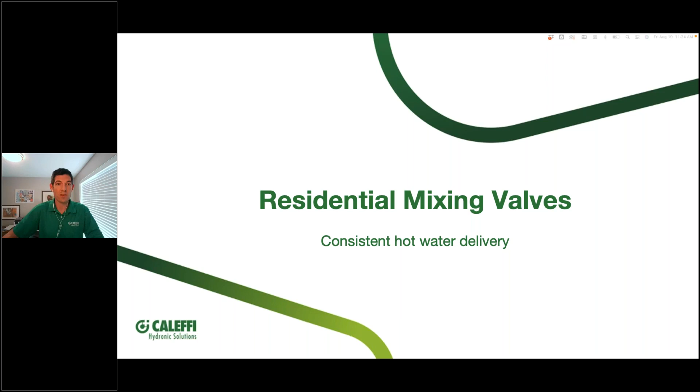Generally mixing valves are thermostatic style mixing valves for residential applications, but there are some electronic options too. You'd probably see those in a more commercial, larger building. Often you'll see TMV for thermostatic mixing valve in other literature as an abbreviation.

So why do we use a mixing valve? First, to supply consistent hot water to all the plumbing fixtures, regardless of what's happening in the mechanical room with your water heater, whether it's a consistent temperature all day or if there are fluctuations like you'd see in any water heater, electric or gas. When it turns on, it may heat the water a little warmer than your set point by a couple degrees, then fall a few below before it refires. That's normal, so we use mixing valves to smooth that out.

We use them to protect occupants from high temperatures. Whatever happens in the mechanical room, we don't want water to leave the mechanical room and hit a faucet somewhere where you could scald somebody. As plumbing professionals, that's what we're trying to avoid.

Another thing they can be used for is to add capacity to a water heater. You can store the water warmer and build more capacity into that water heater without purchasing a larger model, just by storing it a little bit warmer.

Bigger picture, what we're trying to do is enable load shifting at the utility level and keep utility bills low by staying off-peak electrical. What we're trying to do is boost that thermal battery we have in the mechanical room, and then coast through the periods where we don't want to use electricity because it's more expensive and may cause brownouts if everybody had their water heater on at the same time in extreme cases.

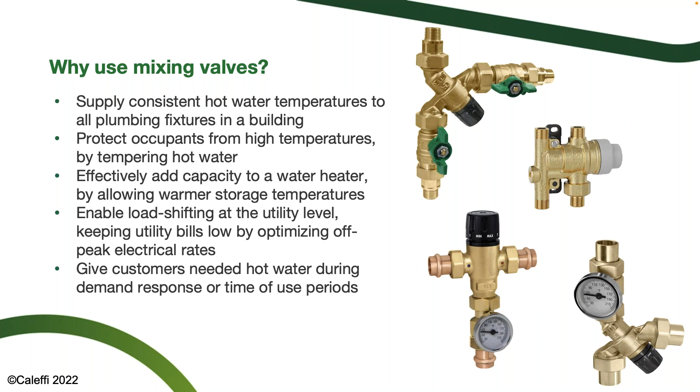So that's one way we give customers exactly what they want, which is hot water during demand response time-of-use periods without noticing anything, without having the customer pay more because they're on peak rates, and also helping utility companies maximize the benefits of renewable energy and not have to bring on peaker plants that make the energy mix less clean. Those are some of the main goals, and how we help with thermostatic mixing valves is generally by smoothing out that delivery.

There are two different styles generally of mixing valves in the thermostatic mixing valve category. A point of distribution mixing valve is going to be an ASSE 1017 listed valve. This is generally located near the water heater, serving the hot water fixtures for the whole building. A 1070 valve, like in the bottom right corner, would be used in a commercial setting, like a hospital or school, where you put one of these valves near a couple faucets, one per faucet, like you'd see in an airport, to limit the temperature at the sink or at a bathtub.

The 1070 valves on the bottom are used for scald protection - they will actually stop flow when they exceed the set point. The valves on top, point of distribution, just smooth out what's leaving the mechanical room, but per the ASSE listing, it does not close the hot port or mix port completely to stop the flow of hot water into the building. I'll cover that in more detail with some valve designs. But the reason we do that is...

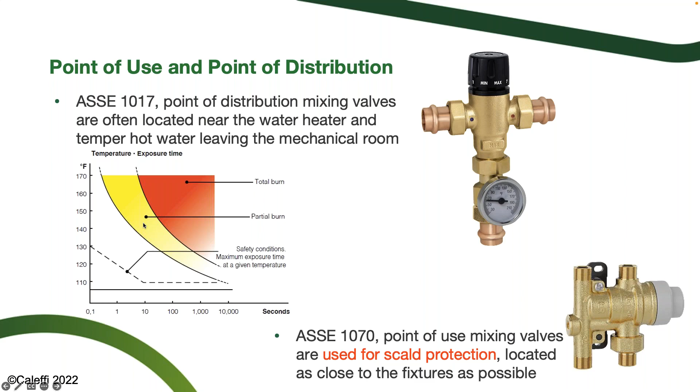140-degree water for 10 seconds is enough to give you a partial burn. And anything warmer than that, if we get into load shifting scenarios where we're storing warmer water, we really can't have that hit the fixtures in a house where we risk scalding somebody pretty quickly. That's what we want to avoid at all costs.

Another reason we would use this thermostatic mixing valve is to increase capacity without buying a bigger tank. Let's look at this example and say you live in Atlanta, Georgia, in this orange 62-degree incoming water band.

If you have a 60-gallon water heater stored at a baseline of 120 degrees Fahrenheit, you could increase the set point to 130 degrees and add 17% capacity. If you stored it even warmer at 140 degrees, capacity increases to 34% above that. So essentially, you're turning a 60-gallon water heater into an 80-gallon tank without letting 140 degree water

leave the mechanical room. That's why you use the point of distribution mixing valve. The next slide will go through the explanation there.

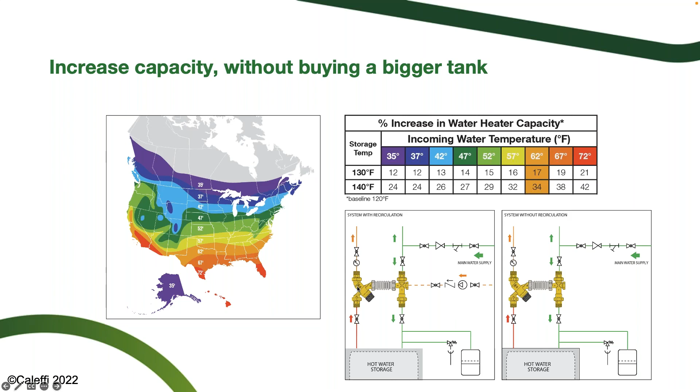So these are a couple simple piping diagrams here. Just a simple valve with or without a domestic water recirc connection coming into the building if it's a larger house. Pretty simple components to allow you to gain some pretty significant capacity there.

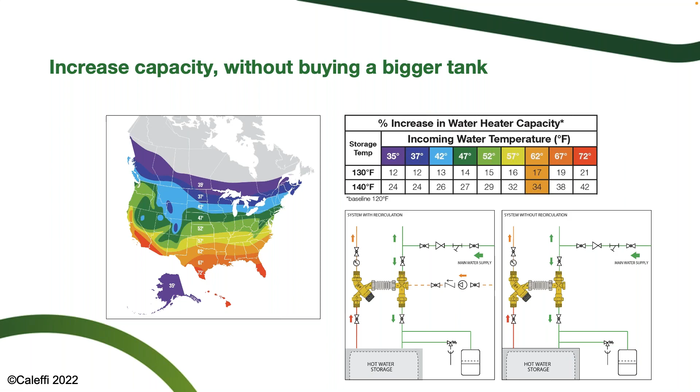There are some cases too where just a bigger tank wouldn't fit in the mechanical room. So a 60-gallon water heater stored warmer could be a good solution there.

Okay, so while the tank temperature may change during the day, when done properly, the occupants may wash their hands, take a shower at any time throughout the day and not notice any difference in the water temperature.

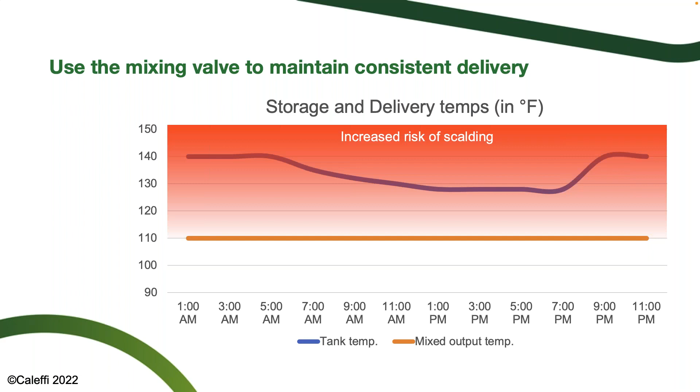It's not safe to send 140 degree Fahrenheit water out to the building, as we mentioned before. So even if the water heater can produce it, what we're going to do is limit the outlet temperature, in this case to 110 degrees leaving the mechanical room. So we're staying well below that higher risk of scalding there.

Even though the tank set point may be higher, you may have charged that up to 140 degrees. You let it coast a little bit during the evening hours and during the day, and then you charge it back up.

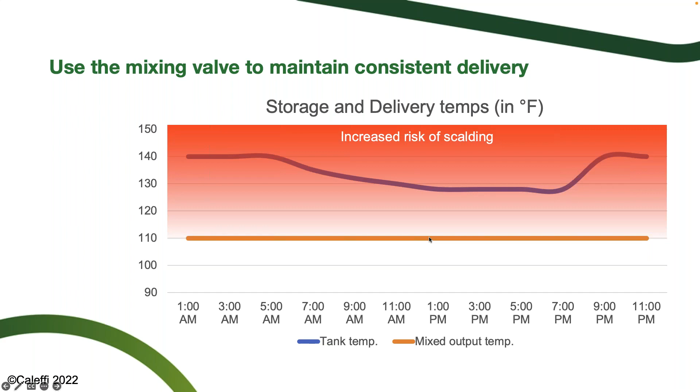So all of this is happening in the background. The only thing the homeowner sees, regardless of what minute in the day they take a shower, is a consistent delivery. That's what we're looking to do with a thermostatic mixing valve paired with a heat pump water heater.

One thing to note for installers when putting these systems together is all mixing valves will have a minimum temperature difference between the hot water inlet and the mixed water outlet. So if you're storing your water heater up to 138 degrees, with an 18 degree Fahrenheit difference, that means you won't get more than 120 degree Fahrenheit water out.

So if you store your tank at 138, that does not mean you're going to mix to 137 and send that out to the building. You have to subtract that minimum temperature difference between hot and mixed outlet, and that's going to give you a realistic number of the delivery.

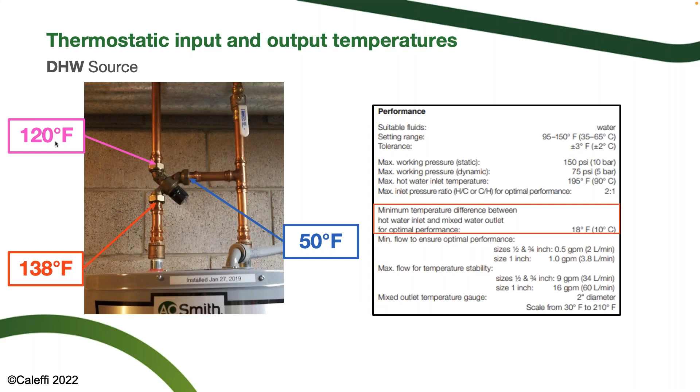What can happen is if you store the tank at 120 degrees and then take an additional 18-degree penalty, that may be cooler than what the homeowner has had in the past with a gas or electric water heater, and they may say this water heater does not produce warm enough water for my liking, and they'll be upset about that. So that minimum temperature difference number is going to help you in your design to know where you need to store that tank.

Okay, so let's look at a couple different residential project examples. This is probably a realistic one - no engineer drawings can be found, you don't know what the minimum or maximum GPM demand is. We'll say that this is an existing building, 2 shower tub combos, 3 sinks, 3 toilets, washing machine, dishwasher.

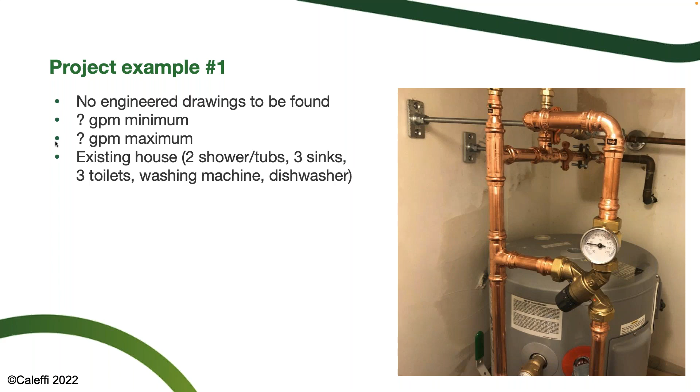So the traditional way to do this is to use calculations from the 1940s. Dr. Roy B. Hunter put together the set of calculations that we refer to now as the Hunter's curves. These calculations were built in a time that a toilet flush might be more than 5 gallons of water. These fixtures aren't really part of the landscape anymore in modern plumbing systems.

So anything that's up to code in the last 20 years is going to have much lower flow requirements for all these different fixtures. In some cases, engineers will have their own modified version of the Hunter's curve to come back down to more realistic numbers for the gallons per minute these fixtures will use.

But unfortunately, the Hunter's curve, just as it existed in 1940, is what most jurisdictions accept to do flow calculations. What we found more recently is it is widely oversized, and that kind of hurts the industry in a few different ways and leads to energy waste and oversizing of components and things like that.

So a modified Hunter's curve is fine as long as whoever's doing the calculation is adjusting it for the fixtures that are on the market with low flow fixtures that we would see today at a plumbing wholesale house.

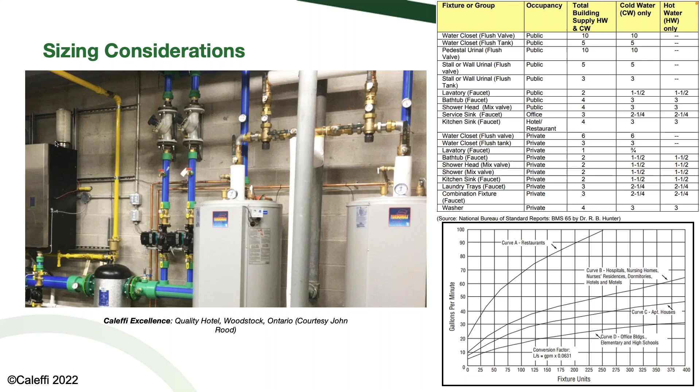So another option - this is something you're going to have to check with your authority having jurisdiction to see if it's allowed - but IAPMO has put together a water demand calculator. This is a free download you can see the URL for. Maybe just for a sanity check, for a reference to see what the water demand calculator says I need. And the number you're looking for is your peak demand flow in gallons per minute.

And it may be drastically less than what the Hunter's curve would be, and that's a good thing. That's going to be more realistic to the fixtures we see on the market today, and is something that could really help with the adoption of any type of water heater in the future to minimize installed cost and not affect the performance of the device at all. You're just not so wildly oversized.

So what you need to look for here is, again, check with your authority having jurisdiction and see if it's allowed in the Uniform Plumbing Code Appendix M. Some places, like the entire state of Wisconsin now, allow this, but it may be city by city in other places.

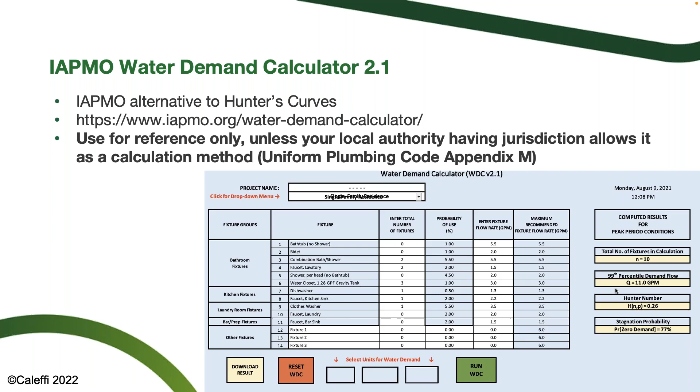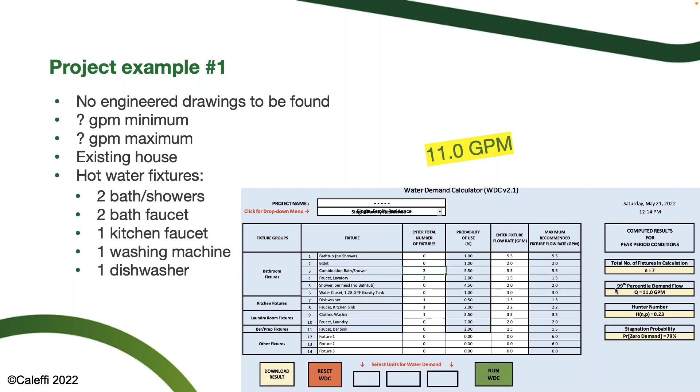So in our project example number 1, we go through the calculation here. We put in all of our fixtures for a single family residence, and we get 11 GPM. Now we're going to pull up a thermostatic mixing valve hydraulic characteristic chart, and let's figure out which valve we need for this system. If we look at our maximum flow rate, we've got our 11 GPM there.

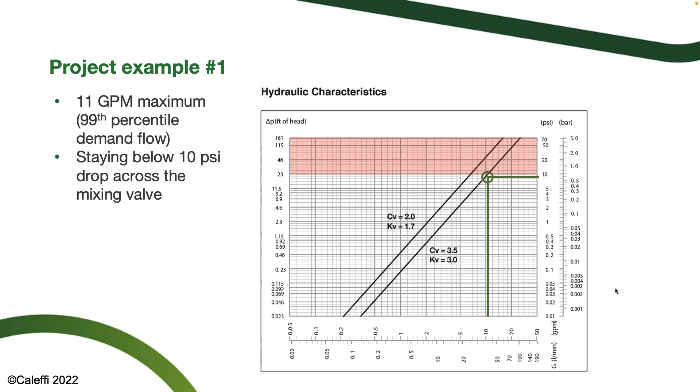And what that's showing is that at 11 GPM, we're going to have a delta P, a change in pressure across that valve, of 10 PSI, just under that number. And that's good. Anything above that number, and you'll start to notice that at the fixture. So if you went up to a 50 PSI drop across that mixing valve because you were shooting for a higher flow rate up to 20, you would have a very sluggish flow out of a shower, something that the homeowners would definitely notice. So you want to stay below that 10 PSI as a general recommendation. Some engineers will say 7.5 or have their own number, but that's a good place to shoot for.

So in that case, we are going to select a 3.5 CV valve, this black line right here. If we went with the smaller CV valve body, it would be too much of a pressure drop. So let's go with that 3.5 CV valve.

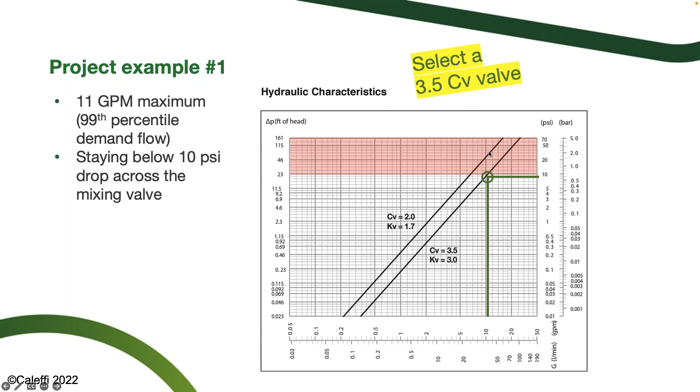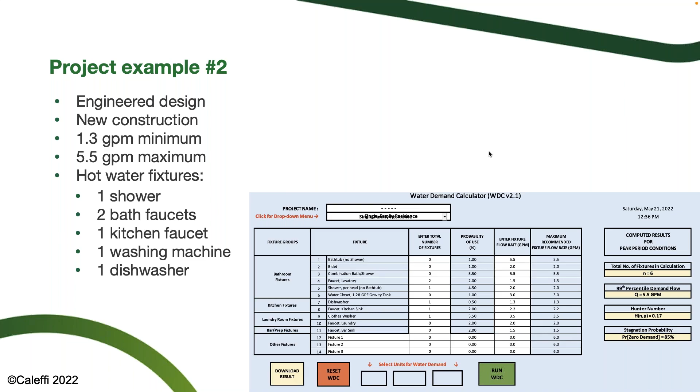Now let's look at a second example. So in this case, let's say it's an engineered design, it's new construction. We know from the engineer based on this building that it's a 1.3 GPM minimum and a 5.5 GPM maximum. They've gone through all the calculations, they've figured out what that number is. So that's something that we can take those numbers and just go right to the selection chart. We don't have to do any of the homework ourselves.

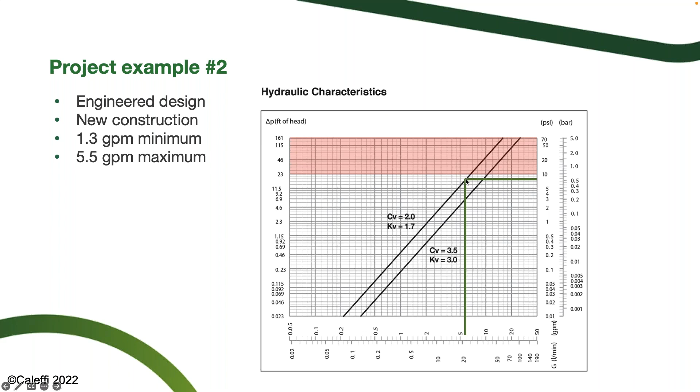So in this case, if our maximum is 5.5 GPM, we can go with the smaller valve. This is something that's going to save some cost on the project because it's going to be less brass generally. The valve body will be smaller than a larger CV valve and will be the better performance curve for the product we're looking for. So we'll go with the 2.0 CV valve in this case. And then for our minimum flow rate, we're well covered there too, down to the low end, the 1.3 GPM there. You want to make sure that your curve will cover the low end as well.

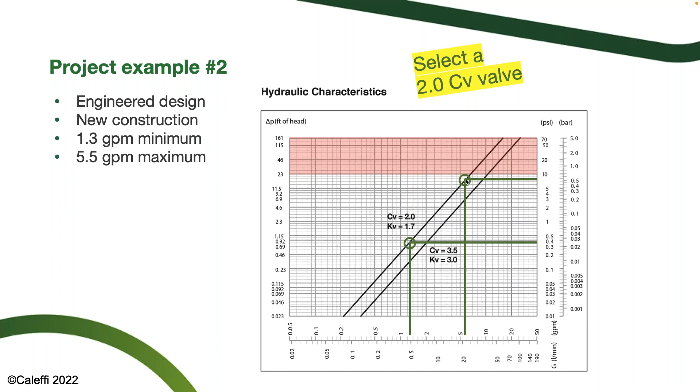To go into a little more detail, the reason you want to pay attention to the minimum flow requirement is something you'll look at in the valve specs to see what the different minimum and maximum performance characteristics are. So if we went with that smaller valve body, in this case, the minimum flow rate is 0.5 GPM, but the 1-inch valve body, a little bit bigger, would be 1 GPM. Now, some thermostatic mixing valves will have the same size tail pieces. So this 1-inch valve with a larger CV and a larger valve body has a minimum GPM of 4.4. So that's going to be too big for the low end of that project we talked about. If the minimum flow rate was 1.3 GPM, but this valve, even though it's still a 1-inch valve, is up to 4.4, it's going to be too big.

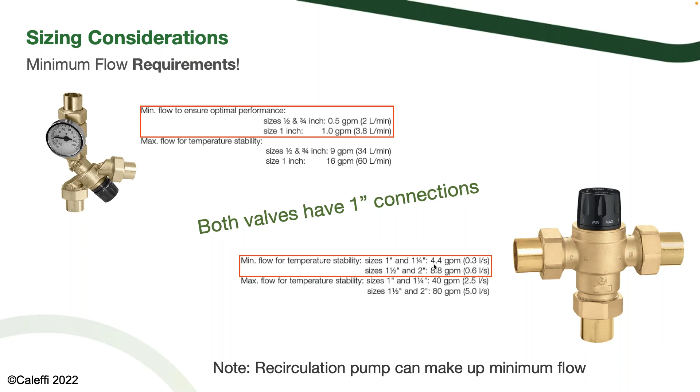In bigger homes, the recirc pump can make up for the minimum flow. So it's really just to make sure there's enough turbulence going through the body of these thermostatic mixing valves for the sensor to react and have stable performance. If you're below that minimum set point, it can hunt, shooting a little high and a little low, oscillating back and forth, which you would notice in a shower or something like that. And that's not something we want. So again, both have 1-inch connections. Connection size alone is not enough to size a mixing valve. You need to look at the chart a little deeper and make sure you've got the right product.

Okay, so to look at the CV a little more, these are the same two valves from the last page. This smaller valve has a CV of 3, and it's going to be a lot less expensive. This valve has a CV of 7, but it's also going to cover a much larger flow rate without too much pressure drop. So I'll walk through this chart on the bottom here. If we're looking to find the CV of a valve we don't know, something existing, we can take some pressure gauges upstream and downstream of the valve, find what the pressure drop is across it, and then if we know what the flow is in GPM, that's our easy CV. So in this case, it's a 3.

So if you know any two variables, you can calculate for the third. If we know that there's a 20 PSI drop across the valve and that it's a 3 CV valve, we can figure out that we have 13.42 GPM across the valve.

Now if we want to find the pressure drop, we know that we have a CV of 7 with the valve—we'll use this larger one in this example—and we've got a flow of 13.42 GPM. We can calculate that the delta P across that valve is going to be 3.68.

So look at the difference: a 3 CV valve is going to have a 20 PSI drop across it, which is higher than what we said was a good number with that 10 PSI drop. With the larger CV valve of 7, it's only 3.68, so it's a much better valve for that flow rate of 13.42 GPM. The larger valve is going to better handle those flow rates without affecting the fixtures.

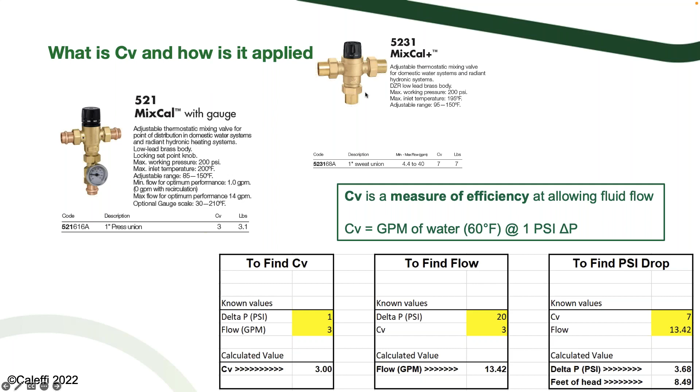So in the bigger context of electrification, the first step here is that we're changing gas water heaters out for electric heat pump water heaters in existing homes. That's kind of what we're trying to do. But that's setting us up for something a little more important at the utility level—to be able to charge up the water heater like it's a big electric battery. It's just a big thermal battery down in your basement, and it's going to help us not use as much electricity on peak. So we store it warmer, we coast through those peak periods.

One thing to keep in mind is planning for ongoing maintenance with these systems. The warmer we store hot water, the faster scale develops on the components. If you stored water at 195 degrees Fahrenheit, that would be a bad idea for a lot of reasons—it would be expensive, and potentially dangerous. You would also scale all of those hot water components in your system faster: thermostatic mixing valves, faucets—it pulls the minerals out of solution at higher temperatures, and they stick to the inside of the components like glue.

So know that if you store at higher temperatures, you need to pay attention—at least once a year to start—to see how fast those components are scaling up, and know that they need to be part of a service plan to make sure you're descaling, or at least planning for replacement of some of those fixtures, maybe months or years faster than if you stored water at 120 degrees year round. We still get the benefit of everything we've talked about, you just have to pay attention to it. It is a machine, a heat pump water heater, that requires service.

One other tricky topic when you're considering a thermostatic mixing valve or an electronic mixing valve is to prevent a scenario called recirc creep. This happens generally at 3 in the morning when there isn't much demand on the system, and you have a recirculation pump circulating hot water to all corners of the building. If nobody's using any water, and you don't have a mixing valve that will close the hot port 100%, the water coming back to the cold port can start to increase in temperature because nobody's using it in the recirc line, if the recirc line ties in on the cold side. Then essentially you're mixing hot water with hot water from the water heater, and that can exceed your set point. It's a ghost thing to troubleshoot because it happens at 3 in the morning.

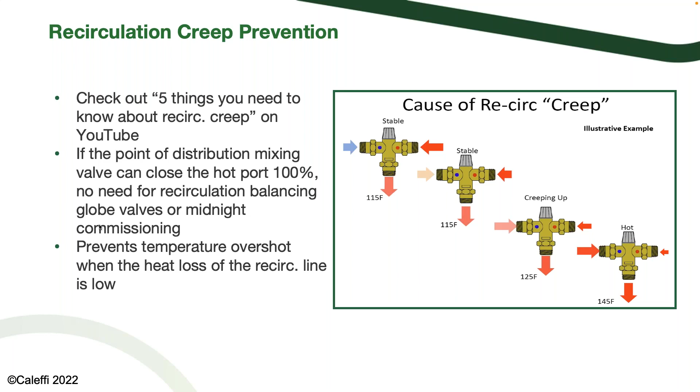The first person to turn on the faucet early in the morning might get a quick blast of really hot water, but then it goes back to normal as soon as there's increased demand on the building, making it a very hard thing to troubleshoot. So valve selection with that 100% hot close-off feature is really important. You can also balance it with a globe valve to split flow back to the water heater, matching the heat loss of the recirc line and throttling it back into the tank - much harder to troubleshoot, but still a possibility. That's been a trick for many years, but just closing that hot port is an easier way to fix it.

Now, another thing to look at - in residential cases there isn't as much hot water balancing needed, but manual, automatic, or thermal balancing valves can help in a large or multifamily building. They make sure hot water goes to all the different risers and laterals evenly, so the hottest water doesn't just follow the path of least resistance back to the mechanical room, because that can be a waste of water. You've got long wait times, and it's a waste of energy because you're circulating water to places that are already warm and don't need more hot water.

So check with your heat pump manufacturer to see if they have specific recommendations for recirc, but know there's a give and take here. No recirc is in some cases better because you're not taking energy stored in that warm tank and dissipating it all over the building. But it does mean in a larger building, if you're 50 feet or more from the hot water heater, you may have longer wait times, and you may actually be outside of code. Usually 50 feet from the water heater is the maximum distance without having to boost it with an electric point of use water heater or something like that.

So you really don't want uncontrolled, uninsulated hot water recirc loops in any scenario - that's a waste. What we want to do with balancing valves, mixing valves, and all the different pieces in a modern plumbing system is to make sure that's the laziest recirc it could be. We just want to move ounces of water per hour through the house to keep wait times low so we're not wasting water, but also use the smallest amount of electrical energy to accomplish that task. Thermal balancing valves are a great way to go in that case too, because they modulate temperature, not just flow rate, helping the system dynamically adapt to temperature changes in the recirc loops.